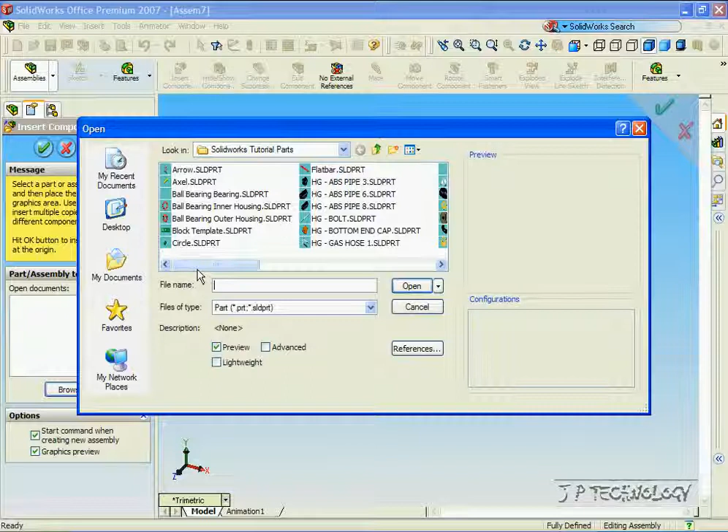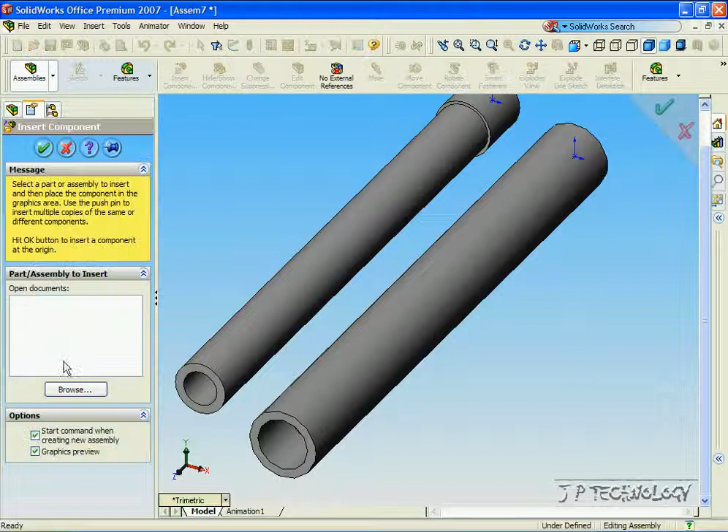All the parts that we need are found on the DVD, and the parts are telescopic 30, 45, and 60. Now with telescopic 60, let's open it up and we'll put it to the origin. Now we've got number 45 and we'll put it beside 60, and we'll get 30 and put it beside 45. Now let's zoom out a bit and let's click wireframe.

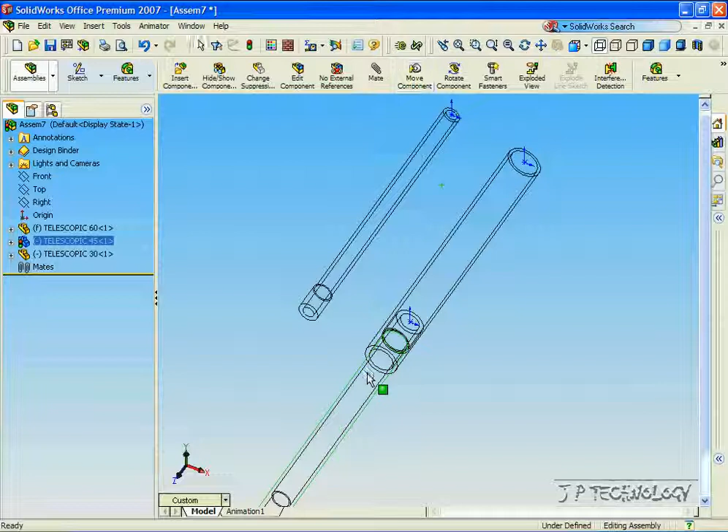Now from the wireframe you can see that inside of telescopic 60 there's an inner radius that's smaller than the rest. And what that's going to do is as 45 moves through it, it's free to move until the two radiuses are the same and then it stops. And that's the same with number 30 when we flip the direction of it. So now let's go back to shaded with edges and we'll begin mating these.

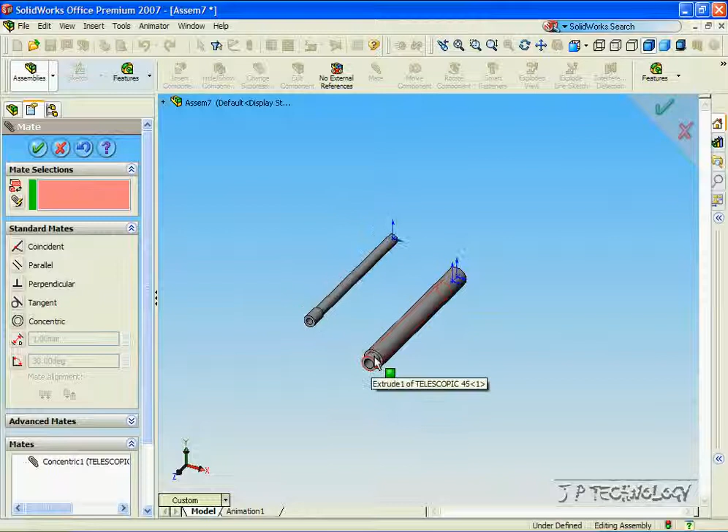Now to start off, let's click mate, click this tube, and we'll make them concentric and click OK. Now let's pull this tube all the way out and let's click the front view. Now let's click this face. As you can see, it's the face that sticks out. And as we go around, we're going to click this inside face of number 60 and we're going to go into advanced mates and we're going to have to do distances.

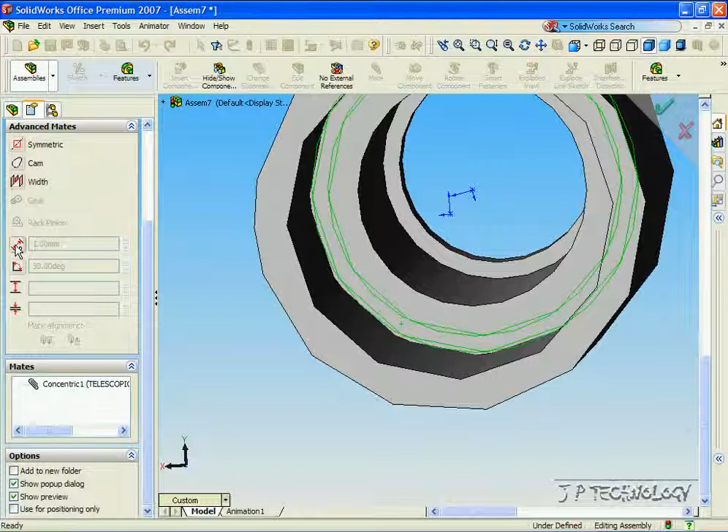Now let's click isometric, click the wireframe so you can see inside what's going on. So what we're going to do is make a minimum value of 0 millimeters and then make a maximum value until the part is completely in. So let's increase this and see where it's going. And it's going in the wrong direction right now, so we need to flip the direction. So now it's going in.

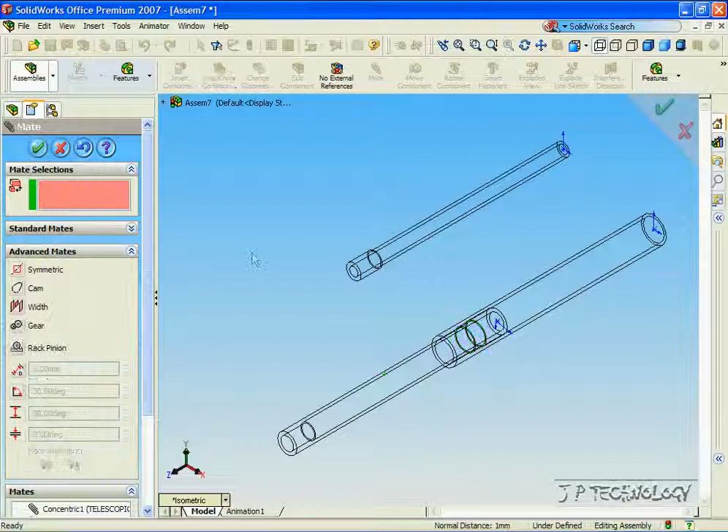So let's see how far we can make it go all the way in. Let's make it 1000, and that's too far. So let's change this to 800, and that looks good. So let's make the max 800. Click accept, click OK, click shaded with edges, and now we've made the first telescopic bit of our assembly.

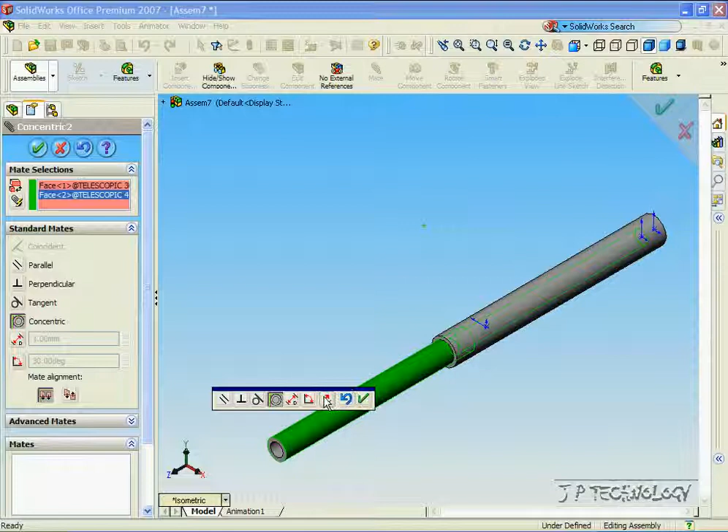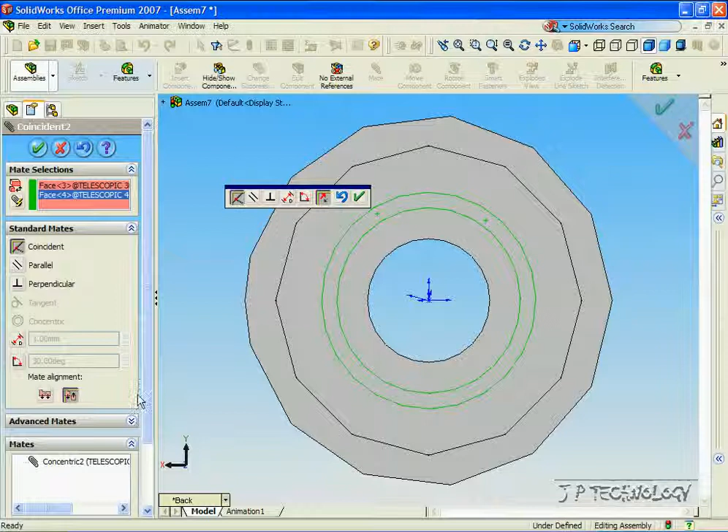Now let's work on the second one. So let's click mate, click this tube, and it's the wrong alignment, so let's flip it. Click OK. Now let's pull the little one out all the way. Click the front view, and we're going to click this face. And that's the face that's protruding out. And we'll go to the back view and we're going to click on this face here and go into advanced mates, and we're going to do a distance again.

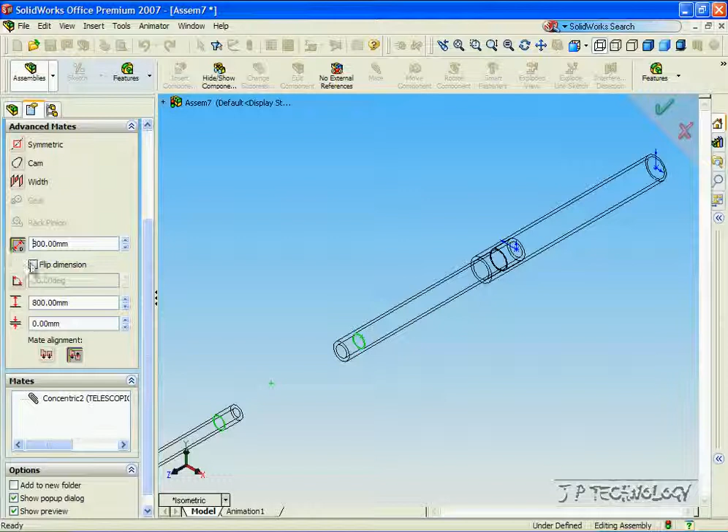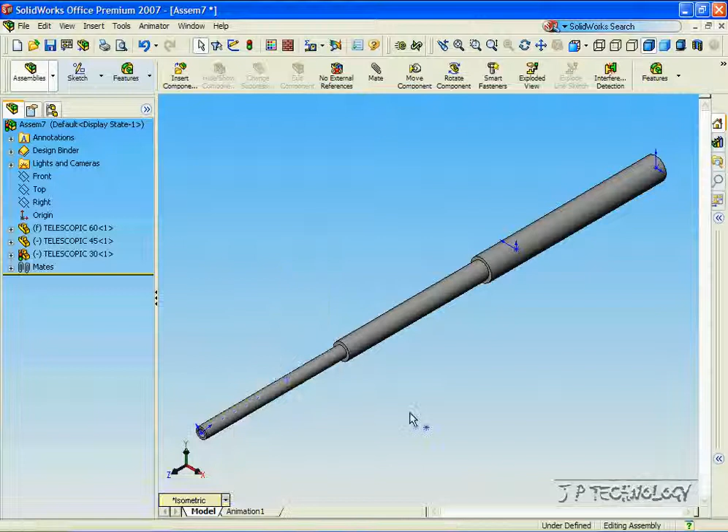So let's click isometric and let's view it in wireframe, and we're going to make a minimum of 0 and a maximum of 800. Now let's see it at 800. Now it's the wrong direction, so we have to flip the direction again. Looks good. Click OK. Click OK. And let's go back to shaded with edges. And we can pull it out and push it all back in. So let's click isometric again. And we've created our telescopic part.

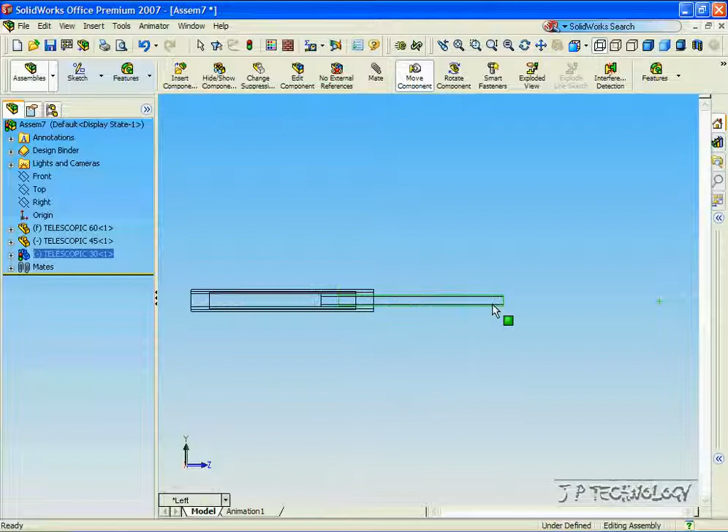Now let's click View. Let's hide the origins, and let's look at it in wireframe. Let's look at it from the left so we can see exactly what's going on. Now you can see as we pull it through, it grabs one, and then it grabs the other. And that's exactly what we want it to do. Now let's click Shaded with Edges again, click Isometric, and that completes our tutorial on how to create a telescopic part with assembly.